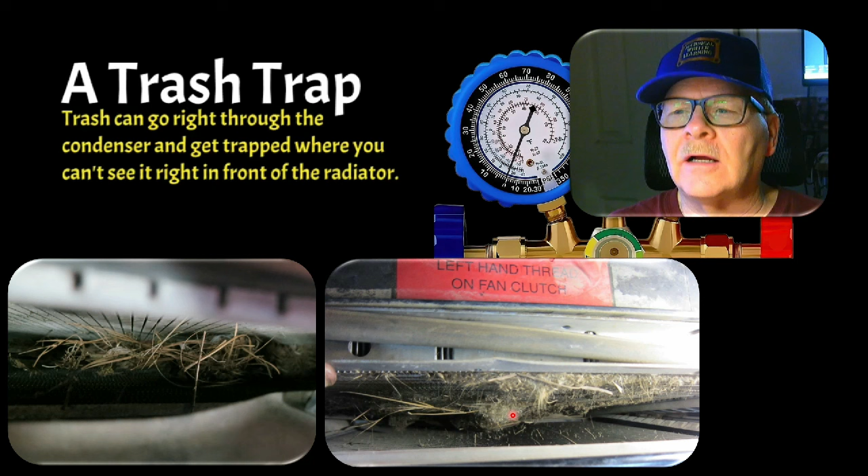Now this is a trash trap that we don't often think about. This stuff can go all the way through the condenser and then get trapped in front of the radiator. And you won't know it's there until you take this rubber off, or if you take the radiator loose and lean it a little bit so you can see down in there. Look at all that crud.

And what happens is, say you start out with zero pressure here, all right? So this is what it's supposed to look like whenever it's running. See, you got about 30 here, and you got a little over 200 here. It depends on the ambient temperature, because it's not going to be the same regardless of your temperature.

If it's colder weather, both these numbers will be lower, and this will be short cycling. If it's hotter weather, this number will be higher, and that one, and it won't cycle at all usually, unless you got it on low blow and max AC and all that. But if you see one that's got really high pressure here, and it's way over in here, and it's trying to even sometimes blow the pop-off valve, or it's cycling it off on an R134 system that's got high pressure cutout, or the fan's running all the time, you need to be looking at this.

Not only this, but you can have a lot of dirt and dust and crud stopping up the radiator. The radiator tends to stop this stuff more than the condenser does. And so just be aware of that. It's always a good place to look whenever you've got a high head pressure problem where there's not good AC cooling. Of course, you need to know the fan's operating too, and that's another story.

Now, if you don't center a new steering unit, and this one right here was one that we got. I don't remember if this one here was one that they brought us from a salvage yard, if I'm not mistaken. But one way or another, if you're changing out this unit and you don't center the original one, and then you got to set the new one you're putting in there in the center, then you're going to destroy the clock spring. I had a student that did that.

He had his wheel turned all the way one way when he pulled his steering gear out in his little Honda, and then when he put the new one back up in there, it was centered. And so whenever he turned the wheel, he hit the end of what this spiral spring could handle, and it just ripped it all to shreds. And it was a $400 part. Some clock springs aren't that high. I have bought clock springs for like a 98 Ranger for like $35. But some of the foreign ones, and if they got other stuff with them, they're super expensive.

So just be aware of the fact that you center this steering rack, you center it, lock the wheel. And then you center the other one the same way when you put it in there so that you don't have a great big surprise.

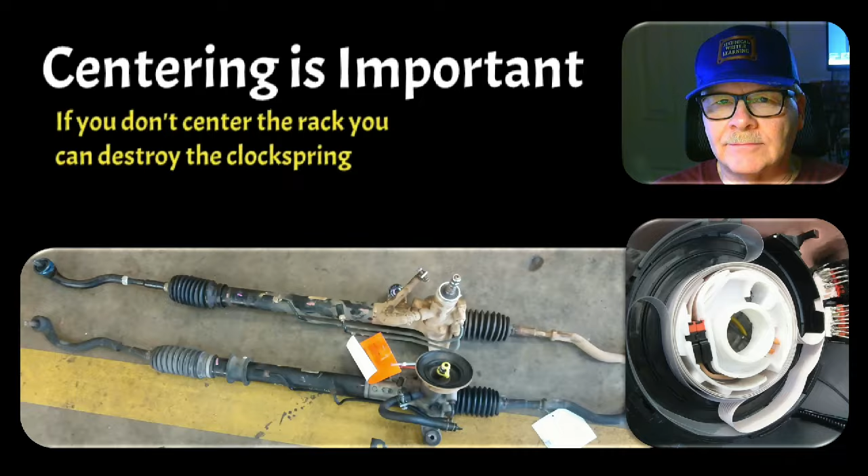Now this president of the college had bought a 75 GMC Sprint, and he wanted us to recondition the engine, make it look pretty. So we pulled the valve covers and the intake manifold off, and we cleaned them up really, really good. If you want to paint valve covers without having the paint come off, here's how you do it. You're going to take your valve cover that you've cleaned all the way down to the bare metal and sanded it really good and got all the dust off of it. Maybe wiped it down with some lacquer thinner to make sure there's no greasy fingerprints on it.

And then you're going to heat it up with a heat gun so that the metal is so hot that it will burn your fingers if you touch it. And then you're going to mist a coat of your orange paint or whatever color paint you're going to do on it. You mist that paint on those things, and let that paint bond to that hot metal. I mean, that works better than primers, believe it or not. Of course, you can prime them too.

But I did that. I learned that working on forklift engines. I had painted the valve covers on a forklift engine. I'd rebuilt a Perkins engine, and the paint cracked up and peeled off the valve cover before very long. And I mentioned something to the parts house guy, David Hughes at Spence Battery there in Port Arthur, about it. And I said, David, this is aggravating. I need to do some primer or something.

And he told me, clean it up real good, make sure there's no grease or anything on it, and then heat it up super, super hot. Even if you use an acetylene torch, evenly heat it, and it needs to be evenly heated, and just mist a little paint on there, and then follow up with your final coat of paint. When I did that, that paint never came off those valve covers again. So you might remember that if you're painting valve covers.

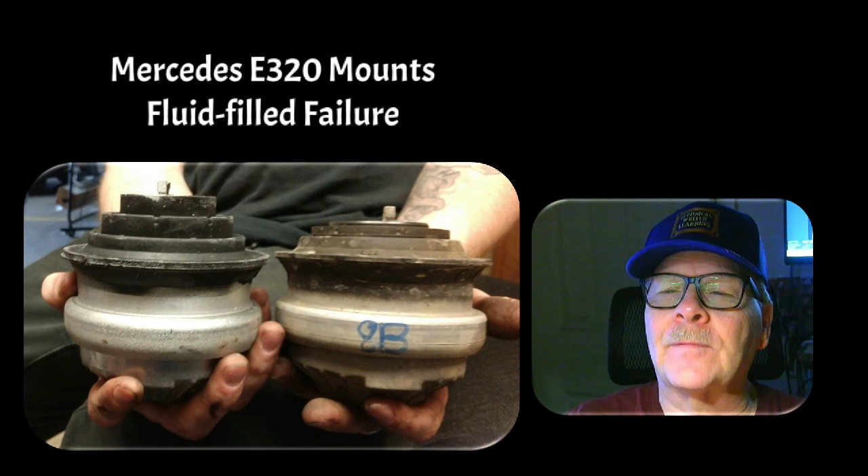These Mercedes E320 mounts were fluid filled. She could feel it when she put it in reverse. It was shaking the car. And so these are a bear to change. You got to pull part of the exhaust system down and all that and raise the motor up.

Got it done. We managed to get these from the parts store for like $60-something a piece, I think. But anyway, this was the one that collapsed, and this was the one that we put on there. This one should look like this one. That's the point. That's the student holding them both in there.

Now, it's a really good idea before you put an engine back in, if it's an older vehicle particularly, to replace the pump seal. They call it front pump seal, the torque converter seal, whatever. Because if that seal is a little bit hard, and then you pull the engine out and the torque converter is hanging on that seal and distorting it, and you spend all your time working on the engine to put it all back in there, you might wind up with a transmission fluid leak that wasn't there before.

So it's really smart to go ahead and use your seal puller, pop that seal out of there and put another one in there.

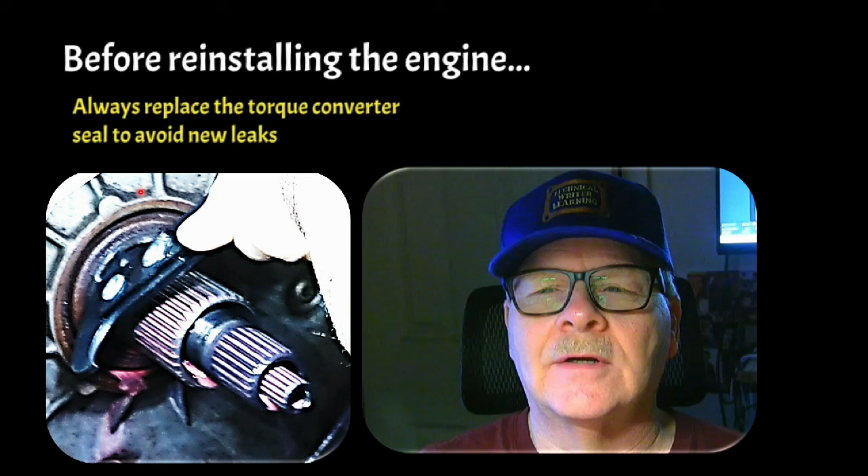Some of your GM transmissions have, after you put the seal in there, to keep the pressure from blowing the seal out, this other thing that you snap over it that kind of bites into the metal around it and all that. If you leave that off, it'll blow that seal slam out of there.

All right, this is an odd, seldom used tool. I was at several shops over the years, and I would see these things. The shops where I went would have one laying around somewhere, and I would think, what the Sam Hill is this? And my buddy Donnie, he was the same way. He'd seen a bunch of these and didn't know what they were used for. But basically, what you're supposed to use it on is this ball nut.

If you've ever rebuilt one of these steering racks, this one's power steering, because see, it's got them Teflon seals and all. This was manual steering, but that's what a ball nut looks like, and it recirculates those balls. It's not like regular threads, you know. It's a whole lot easier and more durable, and the balls have got lubricant around them and all that kind of thing.

But what you're supposed to do is, before assembling the rack and the housing, ball retainer J21552, that's the part number, 21552, must be inserted into rack to allow removal of worm. So it keeps those balls from falling out of there, is what it amounts to. You push the worm out with this, and the balls stay in place.

Now, I used to have my students take these steering boxes apart and put all those balls back down in there and all that kind of stuff. And it's annoying. You can do it, and a bunch of them did it. But after a while, I quit doing that, because nowadays you just call a parts store and you order a steering gear and pop it on there.

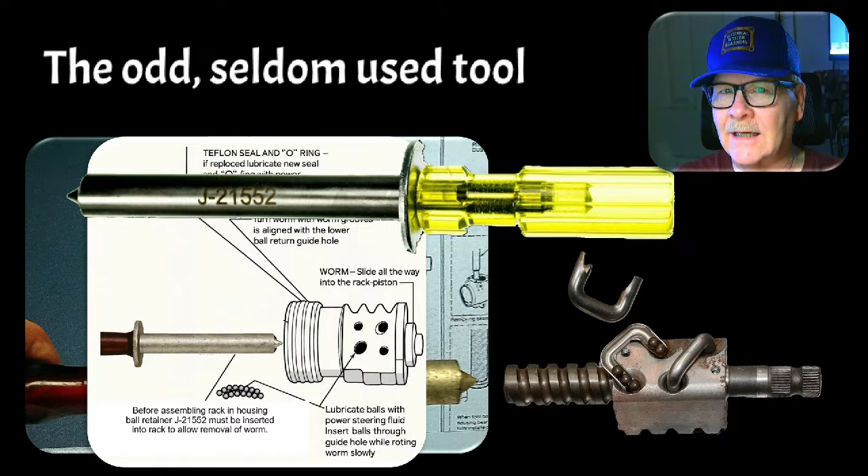Because I could not get that spool valve timed, or there was a leak in there or something. So we went ahead and got another steering gear and put that one in. But I learned at that particular point that you can get in trouble if you don't know exactly what you're doing, and I didn't want to play that game anymore.

2005 F-150 5.4 3-valve. Got new plugs in it too. We would have been dumb not to put new plugs in it. That was the last big job that girl did before she graduated. And she's pretty competent in what she was able to do.

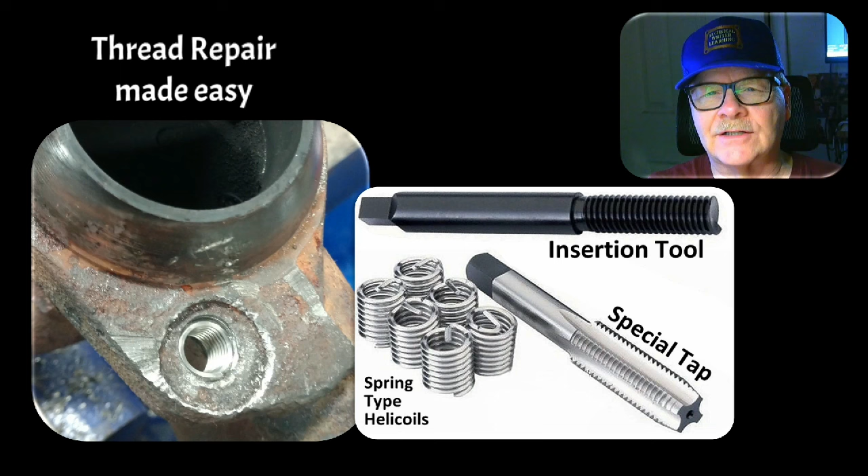And the thing is, whenever you set your crank, you got to measure to see 42 millimeters after top dead center is 24 degrees. And so, you got to do some gymnastics to figure that out. And I put a piece of masking tape on it so that I could turn it to 42 millimeters after top dead center, and that would be 24 degrees after.

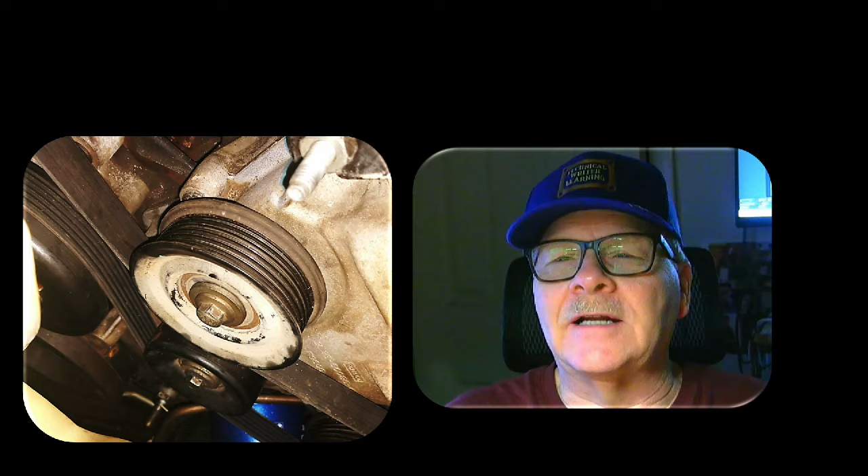This is funny to me how some of these DIY people get it comically wrong. Now, this thing was running okay and everything, but they didn't have a belt routing diagram, and they were just putting the belt on there any way they could possibly think of that it might work. I've seen that before. There was a Cadillac that came in, and the belt was routed so that it would work, but it wasn't routed right. If somebody gets lucky piddling around, they keep trying it. That's a pretty tough person there. But obviously, it was not supposed to ride the back of the belt. Anyway, I took a picture of that because I thought it was interesting.

But there was one Dodge van, and I don't even know if this is feasible or not. They told me it was running too cool, and I said, well, it's just about got to be the thermostat. And he called me back and says, no, it wasn't the thermostat. The belt was routed wrong. And I thought, how's that going to make it run too cool? He didn't have cabin heat. And he said that's all it took. Of course, on a Dodge Caravan, you don't have a metal impeller. It's plastic, so it didn't rust away. I don't know, just very strange.

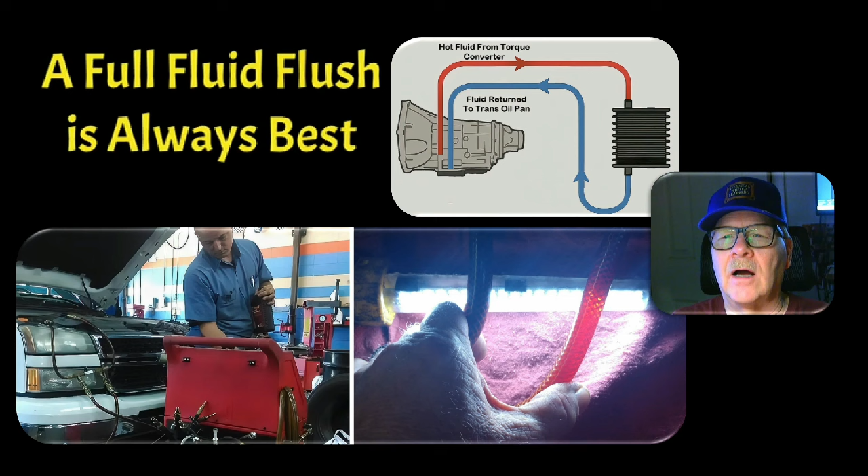Now, this full fluid flush is always best to do. There's Bobby doing one. Bobby was a veteran of the military. But anyway, you connected this between the transmission line, in other words, you're going to connect it here. The fluid is going to go through the machine, the dirty fluid will go into a tank on the machine, and the clean fluid would come out of another tank. But before you could connect these, there was a valve here that would let this fluid just flow. And these were clear hoses. So you would connect these up, fire it up, and see which way the fluid was going. Once you saw that, you knew how you were supposed to hook this up.

Dirty oil, clean oil. And then you would close that valve in the middle, so the dirty oil coming out would go into the machine. The clean oil would leave the clean oil tank and come back in here. Now, if it held, for example, 13 quarts, like some transmissions would, I would run 16 quarts through it to make darn sure that I had replaced all of the fluid, because it leaves the torque converter, because that's where the heat's generated. It goes through the cooler, goes back into the pan, and it gets picked up again. That's how it keeps it cool. All the heat in an automatic transmission is created in the torque converter anyway. But after we did that, we'd pull the pan off and we'd do a regular service.

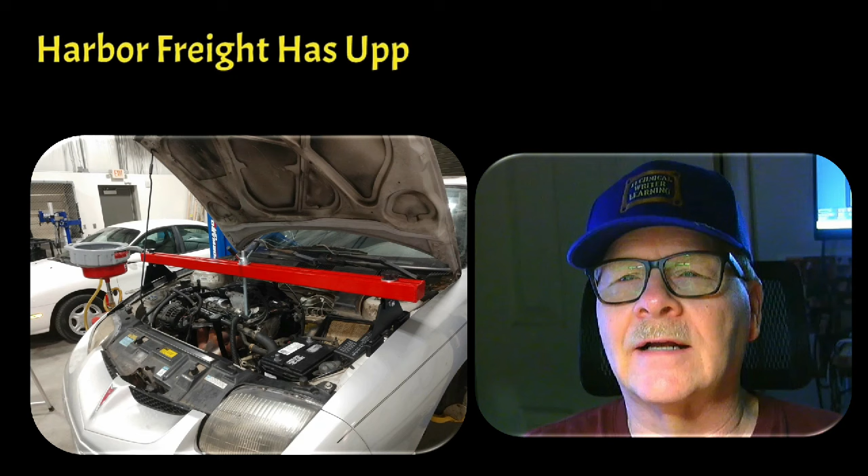Now, Harbor Freight's upped their game a little bit. They got some very sensible tools that you can buy pretty good. They got some pretty high quality scan tools over there too, if you haven't looked lately. Got a whole bunch of different grades of those, and they got a super expensive scan tool. It's like $1,700, and it actually has access to a library of, I think, wiring schematics and TSBs and all kinds of stuff.

I bought a Zurich scan tool from there that I use. It's got the Ford style power balance test on it, which is really handy. And then I got another one that I bought, you know, just to horse around with.

But this engine support fixture is very simple, very easy to use. You can adjust these in and out because this is a slot right here. I don't know if you noticed that or not. So whenever you see how simple that is, you got this right here slotted, and this right here swivels, so it's going to sit, you know, perfectly level all the time.

And it seems to me like when I bought that thing, the students were pulling a transmission out of that Pontiac there, but I don't remember what I paid for this doggone thing. It seems to me like it wasn't all that expensive, but it was perfectly functional.

And I was telling my guys, when you're getting started, you do not need a little toolbox you can carry in one hand from Snap-on that costs $3,000. That's ridiculous. If I was just starting out, I'd hit Harbor Freight real hard, because you can get tools that will do the job at Harbor Freight when you're just starting out, and it won't hurt a doggone thing. And of course, I never was terribly loyal to Snap-on.

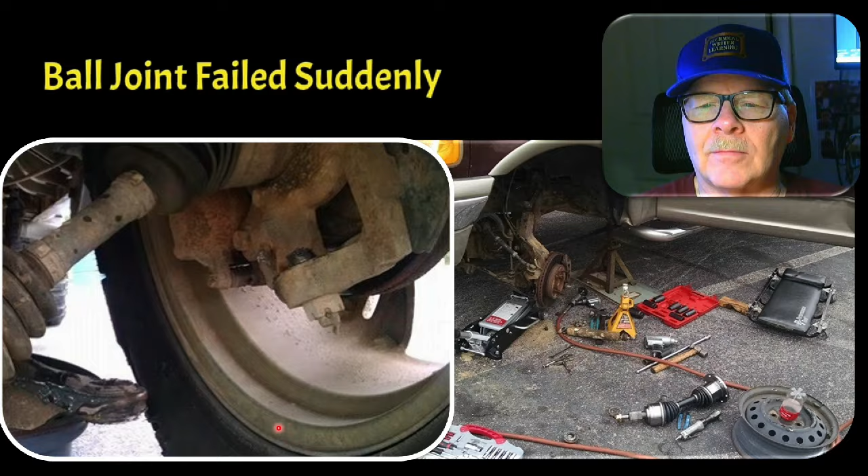And they had it dragged over here, all floated behind the shop, and I got out there and, you know, jacked it up and put a stand under it and put another ball joint in it and fixed it and all, you know. The CV axle came apart. I got them another CV axle and put in there too.

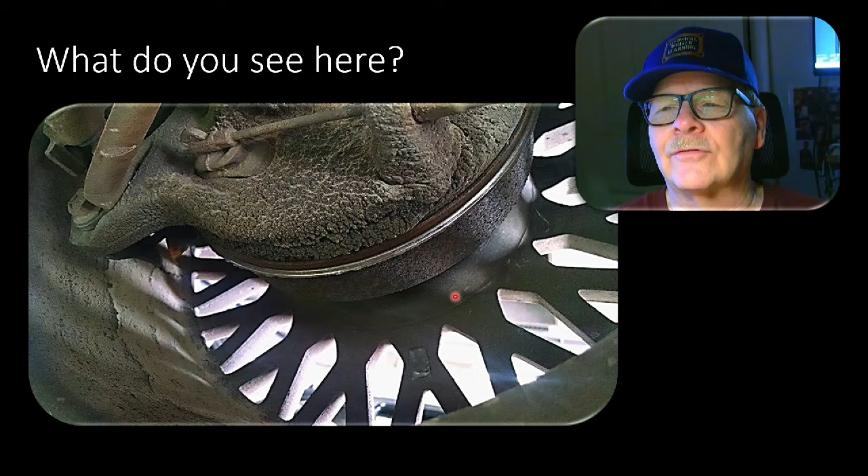It wasn't skipping on that cylinder. I don't know, we didn't measure them all, but the lifter was trying to take up the slack periodically. And one of my students had a really sharp pair of ears, and he could hear something clicking under that valve cover, and that's what we found. We did a plug-and-play 5.3, just got a 5.3 and popped it in there, and you don't have to reprogram anything. You just plug everything in. Everything's the same size. Everything plugs in the same. 6 liter, you could go all the way up to that if you wanted to.